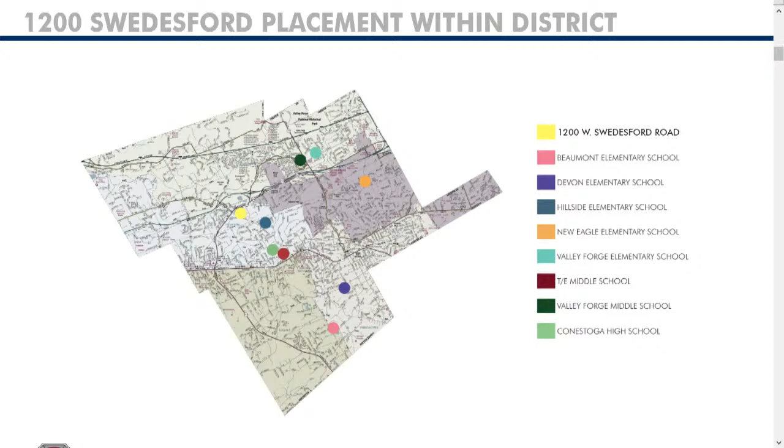To summarize the existing property, it includes a 3-story commercial office building. There's parking clustered towards the north, the west, and the south of the property. There's a vehicular loop that exists presently at the north entrance. There's a grass area immediately north of the building that had in the past been planned to provide for a second building, which was never developed and never constructed.

There's a series of existing stormwater management features, which Mr. Kissinger will speak to later this evening. There's a shared entrance drive off of Swedesford Road, accessing Southpoint 1, 2, and 3, the current office buildings. There's also a pond, a stormwater management basin, located at the southwest of the site. Lastly, there's an existing emergency access off of Howellville Road, south towards the bottom beyond the pond, providing emergency vehicular access over a grass area.

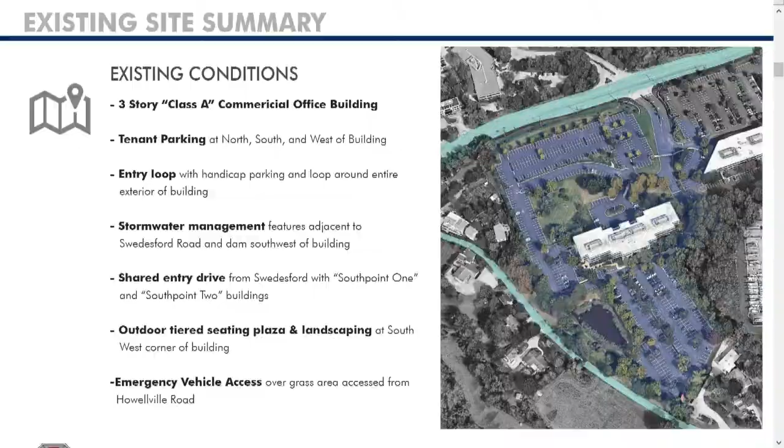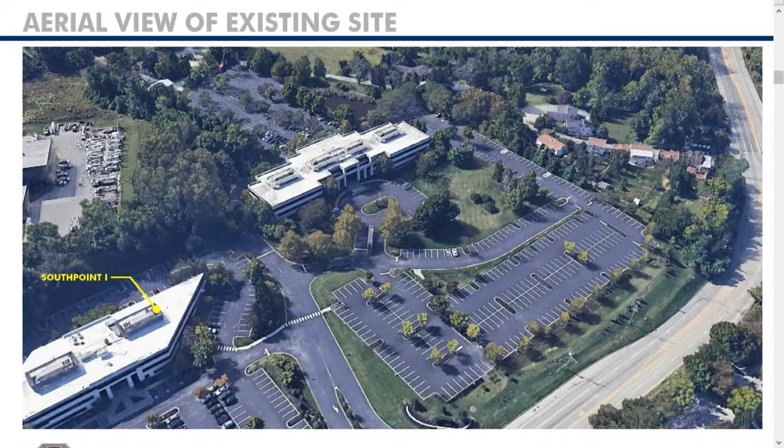I'll now walk us through several photographs which illustrate existing conditions, just to give everyone a better flavor of the current conditions of the site. So this is a view from the north. You see Swedesford Road in the foreground, the main north parking area, and the building beyond.

This is then a view from another aerial view, which illustrates Southpoint 1, the existing commercial office building. Swedesford Road is to our right, and Howellville is really beyond in the image.

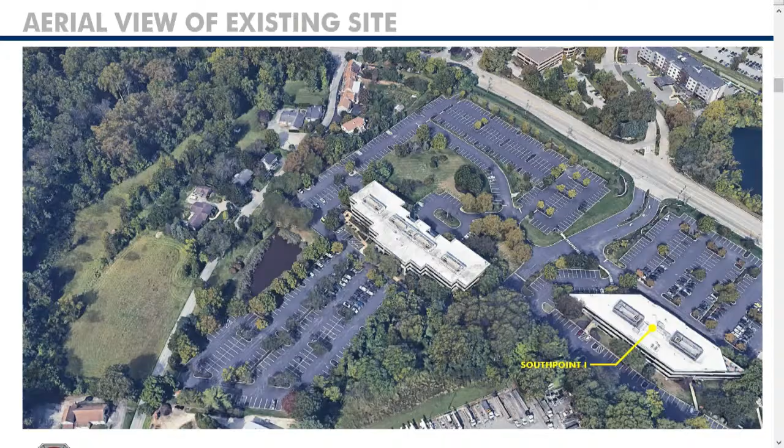This is a view off of Swedesford Road at the existing entrance to this site. So again, this is a shared entrance drive between Southpoint 3, the office building in question, and the adjacent structures. Note that there's an existing median, and that this is a signalized intersection, a traffic signal intersection.

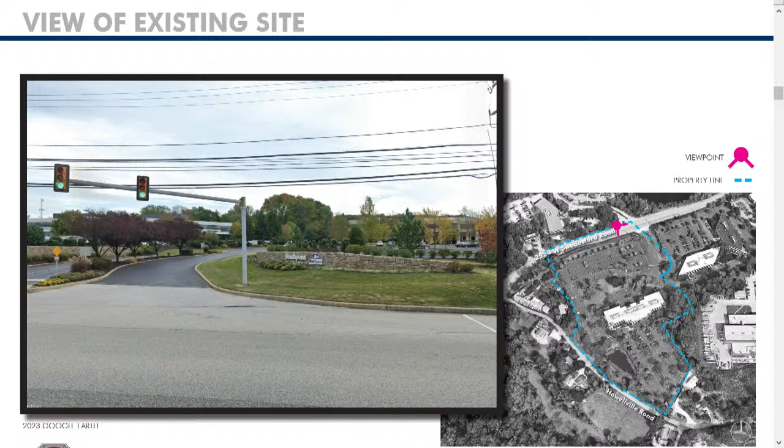This is then a view at the interior of the site. All of these images have a key plan on the bottom right, which illustrates where the view is taken from. So this is really the entrance into Swedesford Road proper, at the point where the entrance drives separate between Southpoint 1 and 2 and Southpoint 3.

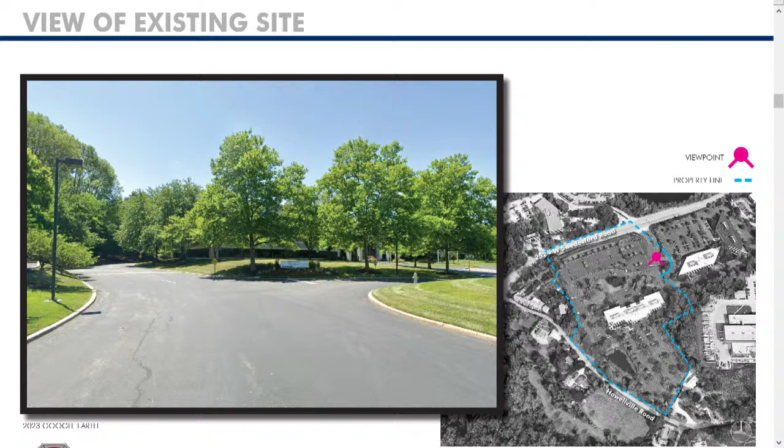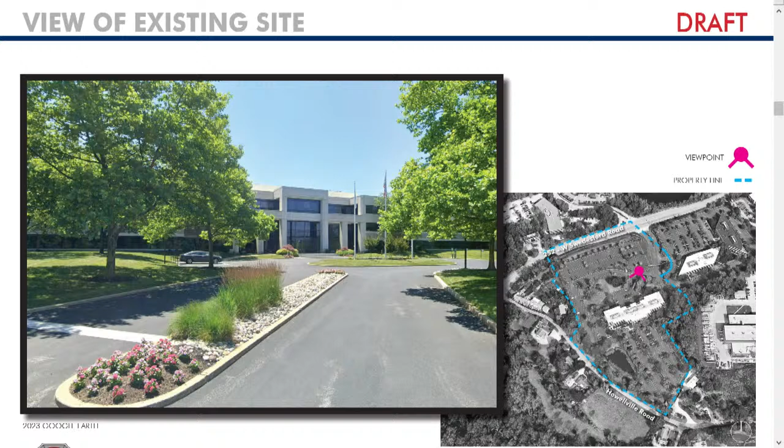This is then a view of the main entrance, the north entrance of 1200 Swedesford Road, a sort of zoomed in version of that entrance. And this is a view at the east, so we're working our way around the building now in a clockwise fashion. This is a view on the east side.

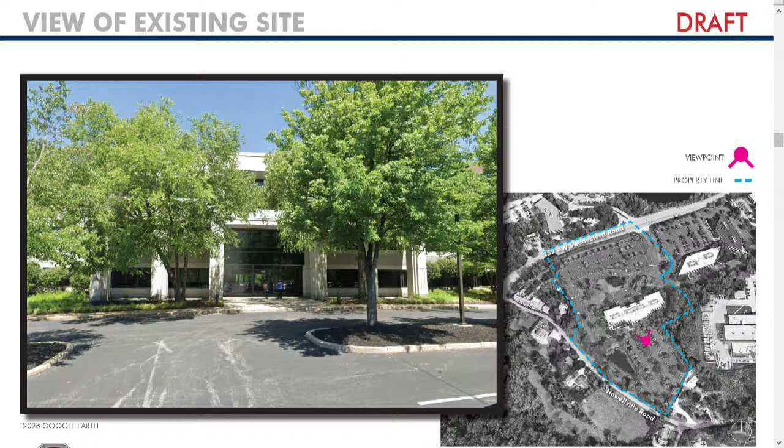This is then the perceived rear of the existing building, adjacent to the south entrance. This is that south entry, continuing to work our way clockwise, and the southwest area. I would note there's an existing tiered outdoor seating area. Also note at the third floor, there's a bit of an architectural overhang at the third floor level.

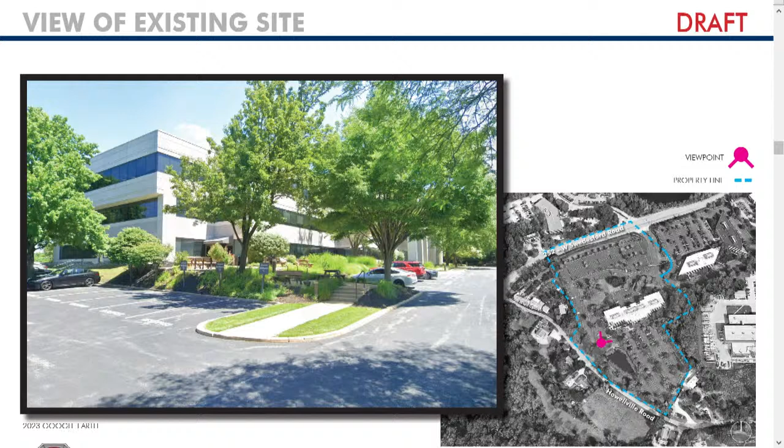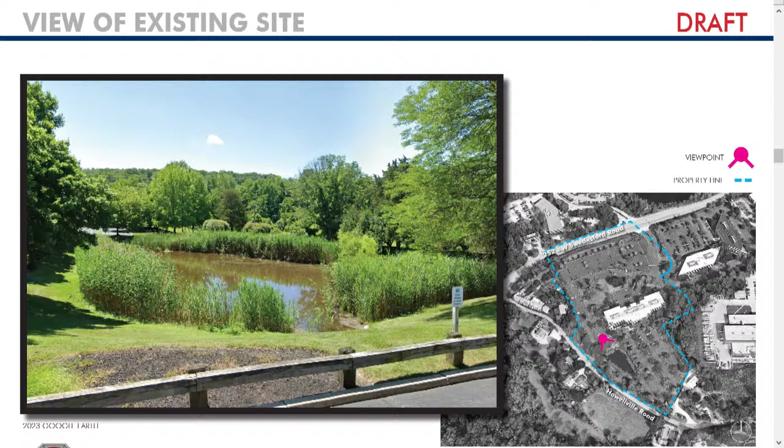This slide illustrates the existing stormwater management pond that we've mentioned, and then slide 19 is an overview of the site features.

I'll ask Mr. Kissinger to give us an overview of the site investigations.

As Mr. Heckendorn mentioned previously, Pannoni was engaged to look at a lot of site characteristics, including environmental and geotechnical. These are a list of a few of the items that we did that are typical during the due diligence period. First is the environmental phase 1 assessment.

Pannoni performed their own phase 1 assessment and also looked at the seller's previous reports to make sure there were no areas of concern on the property, and it was in fact clear.

Pannoni also looked at the land title survey, what we refer to as an ALTA. What that does is look at the encumbrances on the property from easements or other areas. Again, nothing was found there to be flagged.

Pannoni performed a Pennsylvania Natural Diversity Inventory. There were no endangered species. However, there was an item that we'll need to look through as we go further in design about some birds in the area.

We also looked at geotechnical for potential additions and also infiltration for stormwater. That area was investigated in the green areas you see on the property there.

And lastly, on this slide, we also looked at the sanitary sewer capabilities of the building. Converting from an office building to a school is an increase in sanitary sewer flow, so we evaluated the ability for the building to be properly served with sanitary, and it can be.

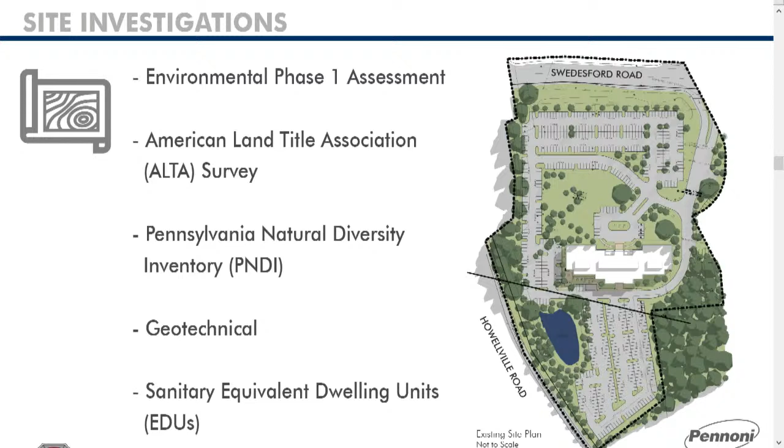Additionally, we looked at all of the utilities for that property and also any kind of distinguishing features such as existing stormwater basins. Looking at this property on this map, starting on the top on the left, you'll see there's a variety of green areas highlighted.

Those are all stormwater basins that were built in 2014, and the large one on the south side of the property was actually built in about 1999 to 2000. So there is a large amount of stormwater management already on the property, a lot of which currently meets code.

We highlighted on the right-hand side an orange line that is the existing telecommunications line, served from the public - it's a Verizon line. Below that you'll see a sanitary sewer line noted, as well as electric lines and water lines as you move down, noted in blue and red.

So again, the point of our due diligence was to make sure that the property was properly able to be served for the future elementary school's use.

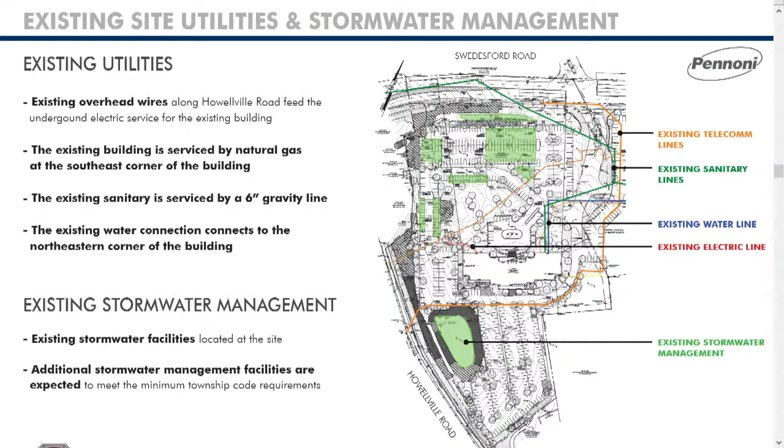To summarize the existing structure, the building was built in the mid-1990s. It's a typical steel frame structure, fully sprinklered. There's a number of what we call, from a building code standpoint, shafts within the structure, consisting of shafts for mechanical ductwork, but also the egress stairways, elevators, et cetera. All of those are enclosed with fire-rated construction.

There's typical building heights, typical structural dimensions in terms of the overall bays for an office building of its size. The general construction is both steel as well as concrete, making the building non-combustible from a building code standpoint. The exterior consists of precast concrete hung on the steel structure, along with insulated ribbon windows.

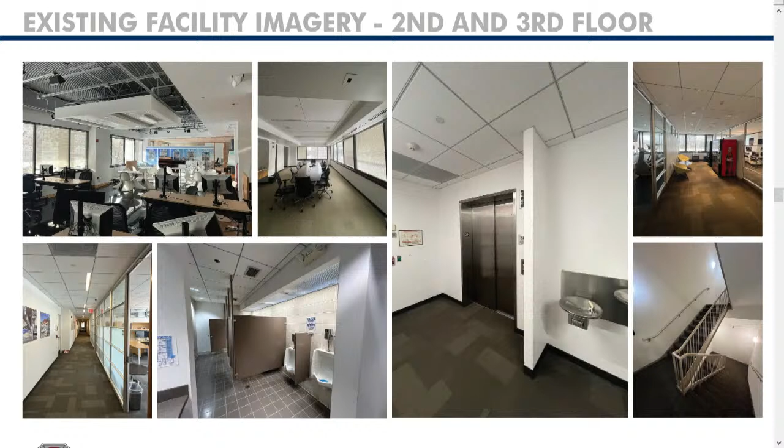These are some additional views of the interior, which illustrate some of the existing office spaces, as well as stairways and one of the upper floor elevator lobbies.

In regards to the existing office building configuration, these are the floor plans at the first and second floor, showing the existing core and shell - the parts of the structure originally designed to be immobile to suit the needs of various office users. Those core elements consist of 3 interior egress stairs, one at the east wing, one at the west wing, one at the central lobby, a passenger elevator, a service elevator, and multi-user restrooms at each floor.

It's important to note there's a little bit of a jigsaw configuration at the top and the bottom, the north and the south. The reason for this is the structure was originally designed to enhance the number of corner office opportunities, maximizing value from a corporate office user and from a leasing perspective. Our concept design addresses that, and we'll get to that later in the presentation.

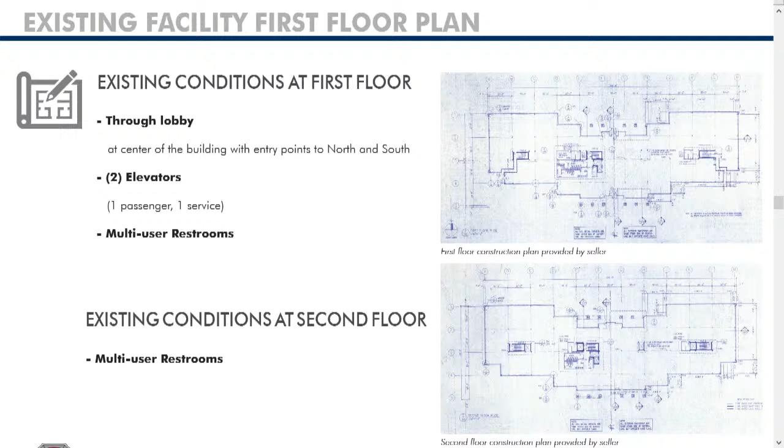At the third floor, there's a bit of an overhang or cantilever that you saw in one of the earlier photographs. At the left and right, or the west and east, the third floor extends over the first and second floors. There's a similar condition at the north and south, where that third floor extends and overhangs the existing floors below.

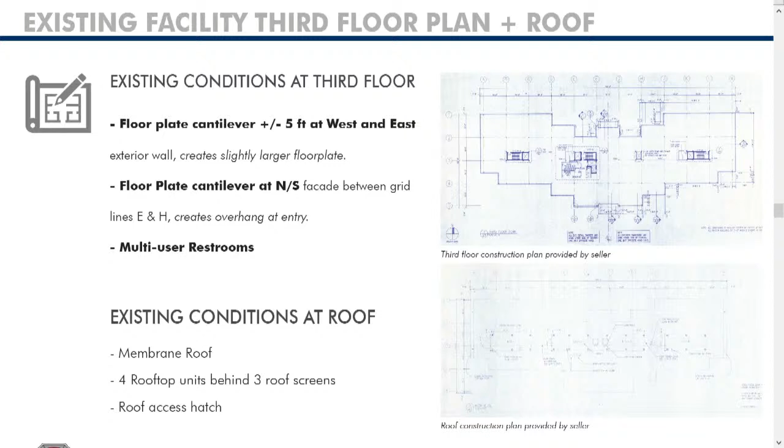Those are existing configurations that our concept design will address. At the roof level, there's an existing membrane roof that's typical and consistent with the types of roofs the district maintains on other facilities. There are also 4 existing rooftop mechanical units, all concealed behind existing roof screens.

From a structural standpoint, as mentioned earlier, AW Lookup, who's worked with the district for many years, evaluated the structural components of the existing building. The primary findings of that due diligence consisted of the following: first, there was really not a structural seismic design when the building was originally designed and built, which is very typical of commercial office buildings of that age.

Based on Pannoni's geotechnical evaluation that Mr. Kissinger mentioned earlier, the property was tested and yielded a seismic design category A, which is a great positive. As part of an adaptive reuse, the seismic design would need to be addressed, and that seismic design category A from the geotechnical testing makes that an easier aspect to achieve from a building code standpoint.

There would also be a need to address structural implications for lateral loads, as well as certain improvements for certain spaces upstairs, which we will address in a moment.

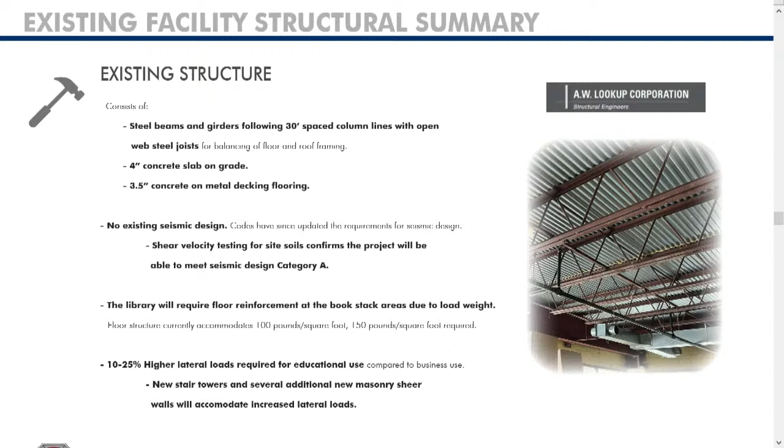In terms of mechanical, electrical, plumbing systems, Schiller and Hersh Associates evaluated the existing systems. In summary, the existing HVAC system consists of rooftop units with ductwork that extends from the roof level, comes down through the building, branches off, and is rerouted via variable air volume boxes, VAV boxes, which is a fairly common system in an office building.

It also consists of an open plenum return. The variable air volume boxes provide treated, heated, cooled, conditioned air to the space, and then a plenum, which is essentially an open area above the ceiling, returns that air to the rooftop units for additional conditioning.

The existing water service, because of its location on the site, in order to demise the building utilities, the domestic water service would be rerouted to the public utility through the site. But the pressure is appropriate, which makes servicing domestic water and sprinklers all very achievable and straightforward.

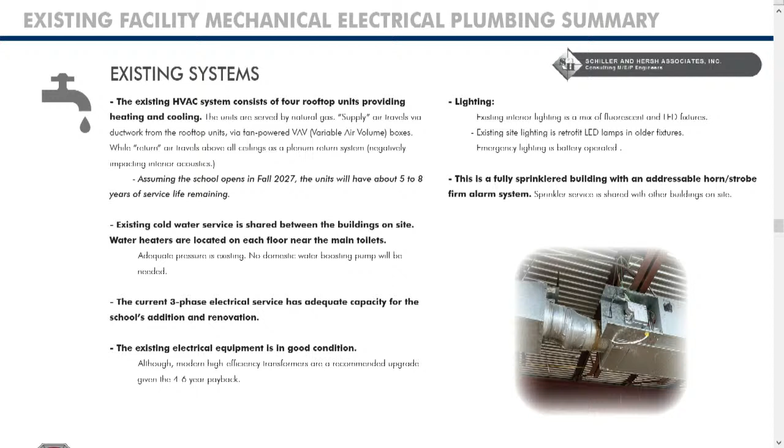The current electrical capacity was judged sufficient by Schiller Hersh for the conversion from office to school use. The current lighting is a mix of older fluorescent and some modern LEDs, and as mentioned, the building is fully sprinklered.

Referring back to the slide about stormwater management, there is a large above-ground basin on the rear side of this property. That basin is very deep, and it was constructed around 98 to 99, and is actually a registered dam by the DEP. It does not meet the criteria of a dam today, but at the time it did due to the depth of those embankments. It has an impermeable liner underneath it to keep water in that pond.

That liner has a manufacturer warranty of about 25 years, so we are quickly approaching the useful lifespan of that liner. Some considerations we looked at were maintenance of that liner, which would require the district to engage an engineer yearly for inspection. Replacing that liner as it approaches the end of its lifespan would require us to dredge the pond, remove existing vegetation, and then replace the liner. So there is a consideration of those replacement costs.

Additionally, that above-ground basin would require a lot of safety fencing to prevent concerns related to having that playground area in proximity to that pond.

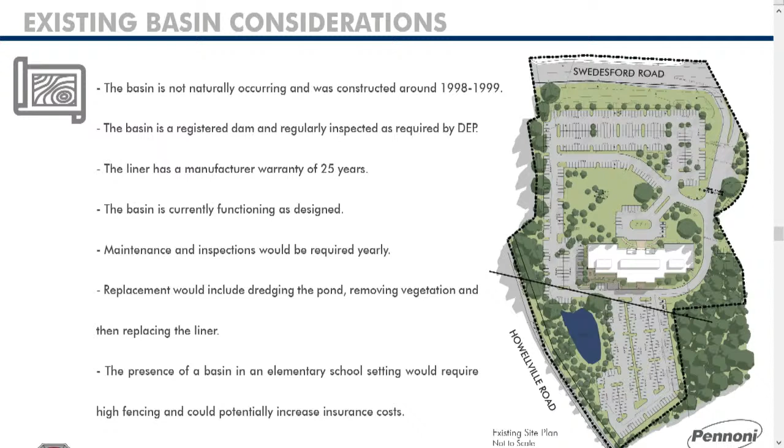At this point, we'd like to turn the presentation over to our solicitor, Ken Roos, who can provide some work that takes place on the legal side as well regarding due diligence, and he can provide both a summary of that work and also how it relates to the resolution before the boards for consideration this evening. Thank you.

In general, all real estate transactions involve some sort of site-specific issues. Since this building is currently part of an office park, there are some nuances peculiar to this deal that do need to be addressed. Right now, the building is part of an office park with the adjoining parcel, and the buildings look like they're all part of the same office park. And there are agreements in place now to make sure that those things remain the same.

What is happening with this particular case is that because the school district is acquiring the property, those agreements are going to be ended, abrogated, so that what's left in place is that we are operating an elementary school. We are no longer part of an office park. The property is no longer part of an office park. And there are some few remaining issues that do need to be addressed.

There are certain things that can't be separated because of the properties. They share an access, they share utilities, which I will talk about in a second.

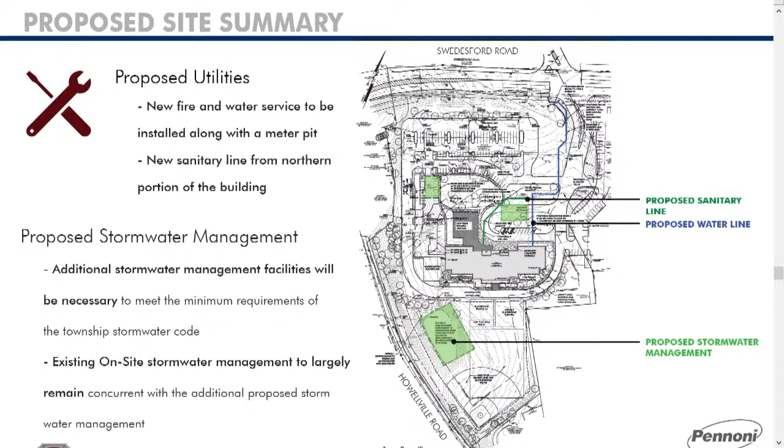Moving on to the building itself, the concept design would yield a school with comparable spaces to any of the existing elementary schools. In general, we're at the higher end of average in classroom sizes and specials rooms like art, science, and music, and we have slightly larger common rooms such as the cafeteria, gymnasium, and library, partly because we have a few more classrooms proposed than the typical elementary school, 30 rather than 28 or 27. Having that additional breathing room in common spaces is important from a scheduling and use standpoint.

The lower graphic illustrates what portions of the building are proposed to be reused versus new. What's shown in green tone is the existing building, and what's in black and white grayscale represents two new additions adjacent to one another. The first is on the north entry where the entrance to the through lobby is. You'll recall we discussed the jigsaw nature of that area with lots of corner offices, which is challenging for creating an interior space plan with a corridor in the middle and classrooms on both sides.

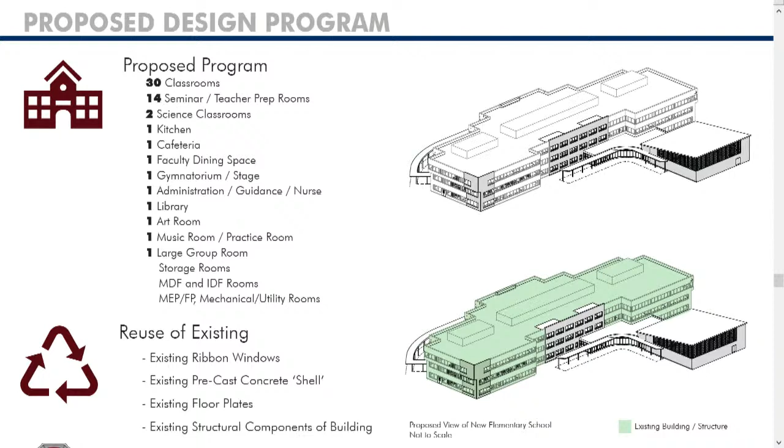This is a fairly straightforward illustration of the existing square footage and the potential for shell space. As part of the evaluation, we were looking with the school district on the program, the parts and pieces, rooms required to satisfy the instructional program. The gymnasium just didn't make sense from a square footage or demolition reconstruction standpoint to try to fit within the existing multi-story office building.

In this scenario, we end up with a surplus of about 9,000 square feet that could be utilized by the district in the future for a use to be determined, which translates to an overall building of just over 99,000 square feet based on this concept design.

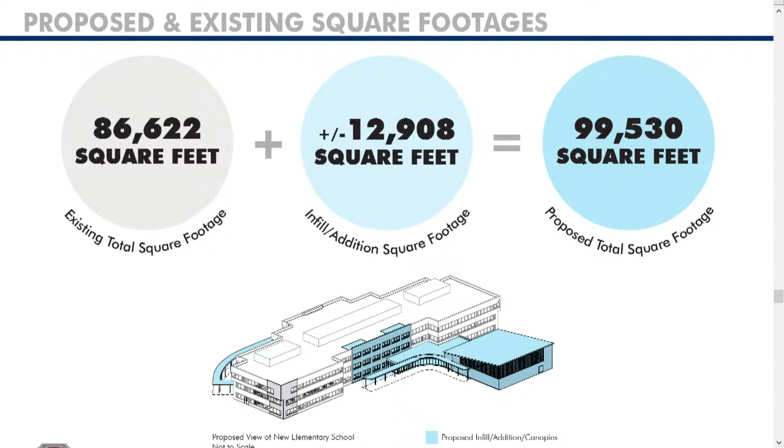We're also proposing to modify and relocate the stairways. The 3 internal stairs were really designed for office users, not for large numbers of elementary school students changing classes at the same time. There's sort of a rush hour effect, if you will. So those stairways would move to the perimeter.

The stairway at the center would remain at the center but get larger, and that would also help us address some of the items I mentioned earlier relative to the structural engineering and complying with current codes.

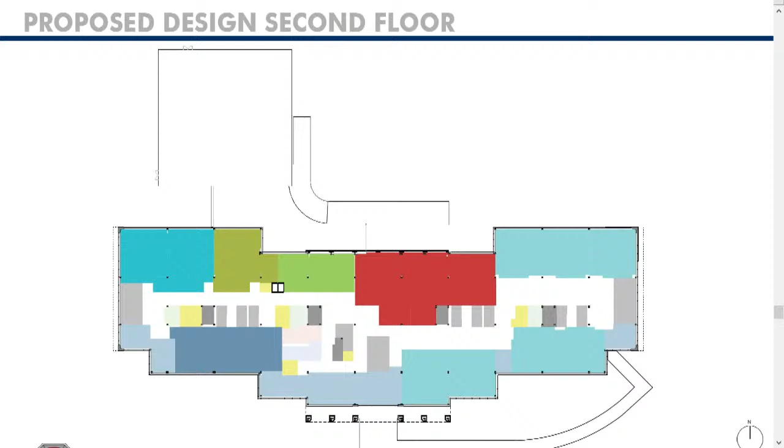The second floor would then include classrooms for second grade, as well as the library and all of the special spaces - science classrooms, music, art, as well as the large group room. The third floor would consist of the hatch indicating future shell space, as well as primarily classrooms for third and fourth grade.

I think what's most important about the layouts to date is the students' perception of the building and how they perceive and move through the space. From a kindergarten through second grade standpoint, this is essentially a 2-story building.

Imagine a sort of slice of bread of the building - this is a basic building section. The gymnatorium, lobby, cafeteria, all the kindergarten and first grade classrooms clustered at the first floor, and then second grade, library, large group room, et cetera, all at the second floor.

So unless you're a third or fourth grade student, there's really never a need to be up at that third floor. We're trying to take into account the students' experiential journey through the new structure.

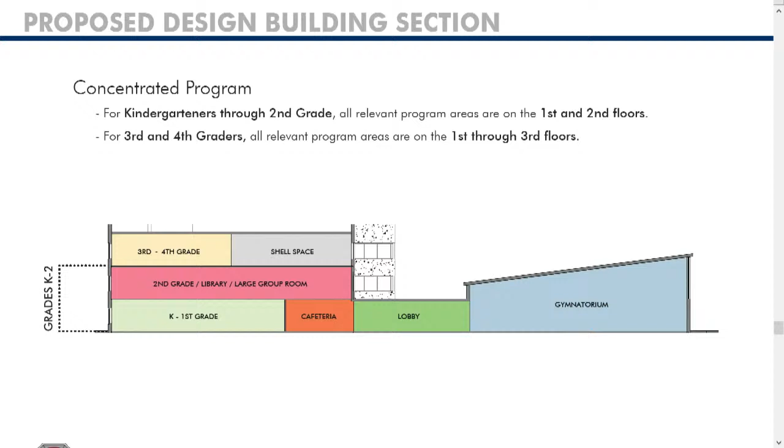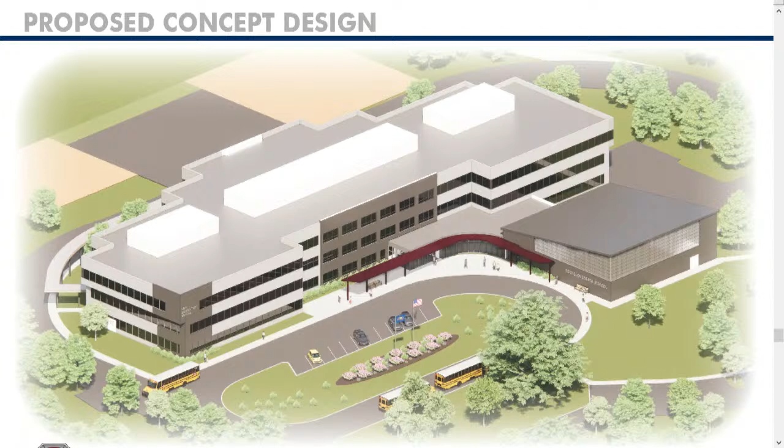The general thinking was to essentially utilize brick and punched windows, which are a traditional Pennsylvania school architectural motif, and a brick tone that would complement the existing precast concrete for the new construction, and do some very selective and limited facade envelope improvements.

We're showing some here at the corner of a thin brick that would complement it to try to tie the whole composition together. This gives you a view of that main entry, and a view of a potential new bus canopy at the bus loop.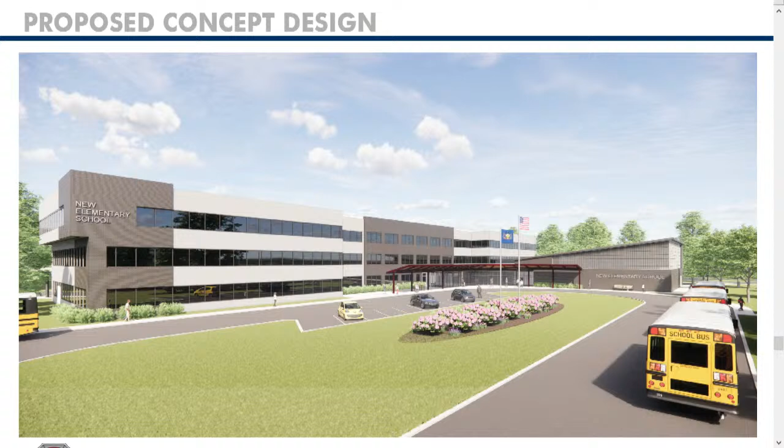The goal here is really, we're not trying to build a Taj Mahal, we're not trying to add every bell and whistle, but we're also not building a Butler building or a shed either. We're trying to walk a fine line of providing an appropriate educational environment that can be used for the next 50 years.

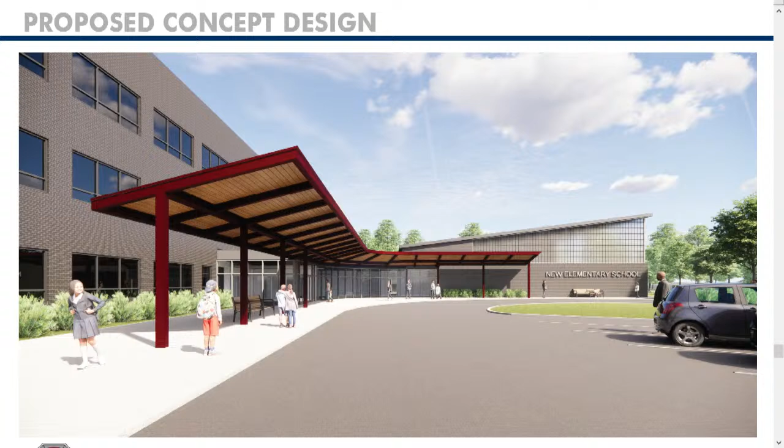So from an HVAC standpoint, we'll talk through several of the building systems. We looked at many options working with Schiller and Hersh on HVAC, and we considered supplementing the existing system, partially replacing it, or looking at a high-performance new system.

The main issues we're trying to address are filtration as well as acoustics. Because of the existing system configuration, leaving it in place or modifying it would result in issues for filtration and acoustics that wouldn't match the district's other educational facilities. So what we arrived at, subject to further refinement during schematic design, is a variable refrigerant flow type system. It's very common in commercial structures today, works well incorporating into an existing facility with limited floor-to-floor heights, and satisfies filtration requirements as well as acoustics.

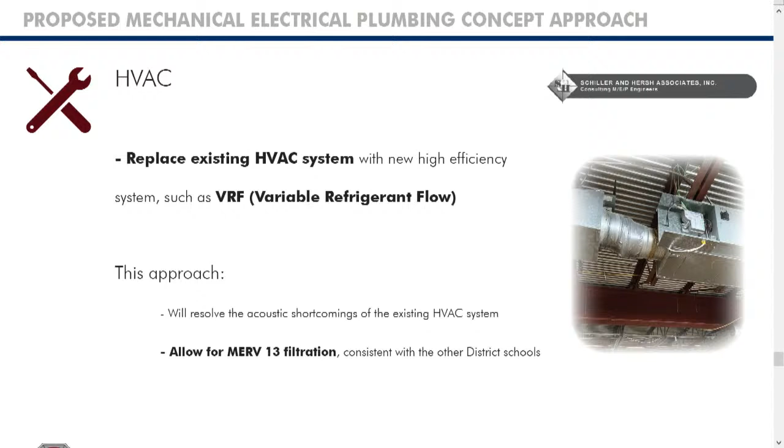In terms of approvals, we'll have a short discussion. Mr. Kissinger and I had a preliminary meeting with Tredyffrin Township and discussed the overall approach to the project. There are really three sequences of approvals that we anticipate the project will require.

One is zoning relief. As Mr. Kissinger illustrated earlier, we're taking an existing site that has a lot of asphalt paving and a fair amount of stormwater management. We're going to maintain all that stormwater management, decrease the amount of parking and paving, create more pervious surface, and still add more stormwater management. Because of the history of the site, the details of when it was developed, and subsequent zoning changes after it was developed, we're still going to need some relief, and we'll go through the Township Zoning Hearing Board to request it.

Subsequent to that, or towards the end of that, we anticipate going to the Township Board of Supervisors for a conditional use hearing. A conditional use is sort of a lower standard of relief required because it's not a variance. That process would be required in order to ascertain what conditions are associated with placing a school here.

And then lastly, we'd go through the Township Planning Commission approvals process from a land development perspective to evaluate the reconfiguration of certain parking areas and asphalt, and incorporation of playgrounds and such. There are some other regulatory entities we'll need to interact with for erosion and sediment control, but we don't anticipate any work associated with PennDOT. These are really the primary regulatory approvals we need to navigate.

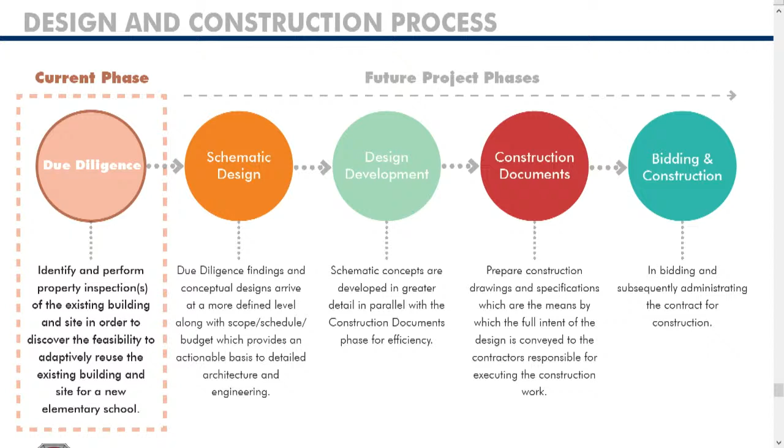From a schedule and cost standpoint, I'll share this slide again. We're in due diligence. There are many decisions to solidify anything of what you're seeing tonight, and there's a long way to go. In terms of a very preliminary schedule, this essentially acknowledges a due diligence period which extends to March 18th. As you heard earlier from the district solicitor, Mr. Roos, that is subject to validation.

But this schedule contemplates that as a due diligence date and anticipates moving forward with approvals, design, schematic design, documentation, bidding, et cetera, with the goal of completing approvals and bid documents towards fall of next year, towards November of '25. Again, this is preliminary, a starting point.

From a budgetary standpoint, this is a project budget based on four building blocks. One was Becker-Frondorf, a third-party cost consultant, as noted in the second slide of the presentation. We've worked with them on the Conestoga addition, the Fields project, and the infrastructure projects the district proceeds with every summer. We provided them with our concept design and engineering information, and they used that to develop a cost estimate for construction, which includes some contingencies.

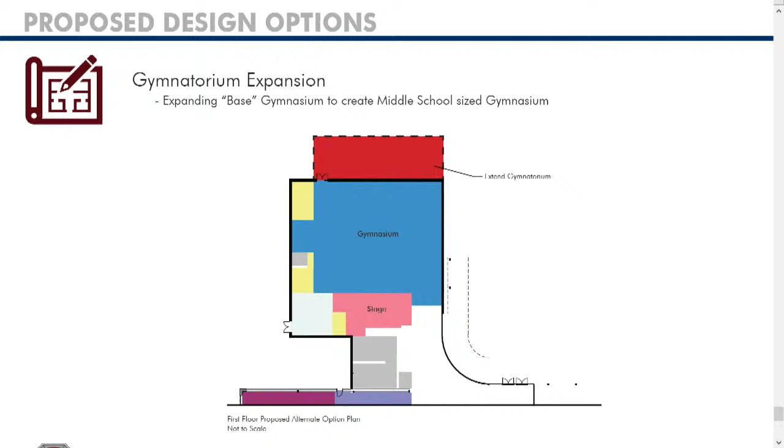As an example, the gymnasium, the gymnatorium as included in the concept design, is illustrated in blue. The red illustrates a potential extension, which would bring the gymnasium space in line with one of the middle school gyms. This is simply an illustration of one potential option. To Dr. Gusik's point, there'll be many options evaluated as part of the project should the purchase continue.

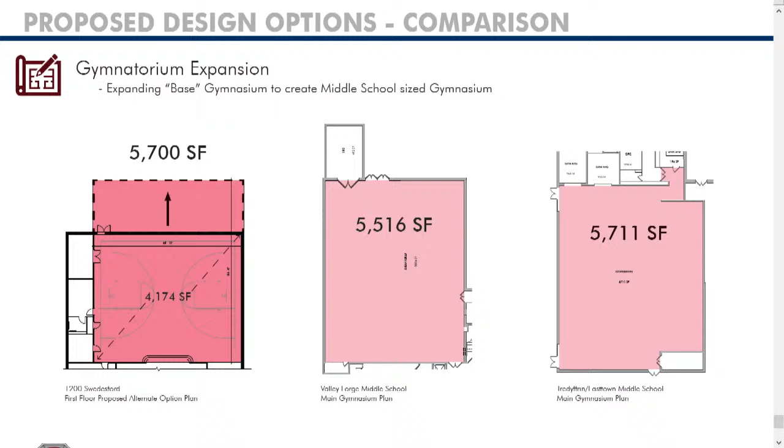One item I didn't touch on directly was the environmental sustainability of the project. This is an incredibly sustainable project. We're taking existing asphalt paving, removing it, maintaining and adding more stormwater management. We're taking the shell of an underused built environment asset and repurposing it for a use that will provide for instructional purposes for many years to come. This is a great opportunity.

With that, we'll turn it back to you, President Kantorsek.

Thanks, Dr. Gusik, and thanks, Matt and Mike, for all the work you've done, and I'm not going to ignore Art and Dr. Simondero over here as well. Even though they didn't speak, they did a lot of work too. It was a very compressed time frame to gather a lot of information about this building and its usability for an elementary school, and you guys did a nice job, which is obvious in the presentation and details.

Still have a couple of questions, I imagine, that the board and folks have. I have one to start — it's really not so much a question, but more an ask for additional details. We talked about the upgrades to the HVAC system, and as you could see from the cost item, that's one of the more significant additional costs. Could you provide more detail about the unusability of the current system from an acoustics and filtration standpoint, and why you think it's important and critical to upgrade or replace that system?

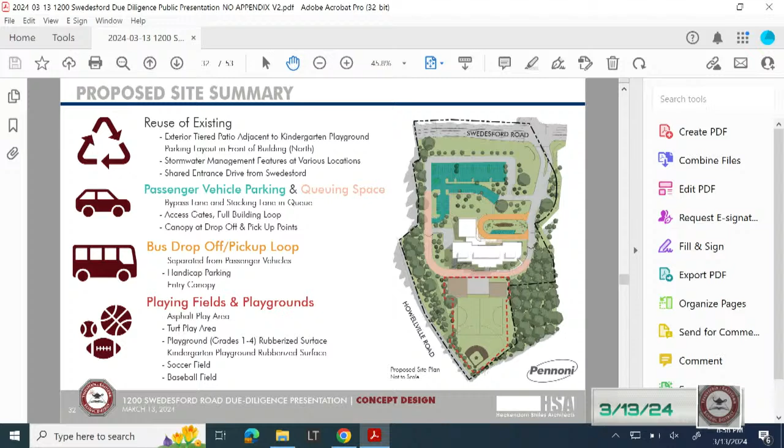The brown boxes on the left and right immediately below the loop road are rubberized surface playground areas. The light gray box in between them is an asphalt play area. The tiny strip below that light gray box is a small area of turf. Those 3 components - the rubberized surface of the playgrounds, the asphalt play area, and the small strip of turf - are part of the district-wide playground study. It's consistent with what exists or what will be added at all of the elementary schools. Everything below those brown playground boxes - the soccer field, baseball, all of that - is proposed to be grass field.

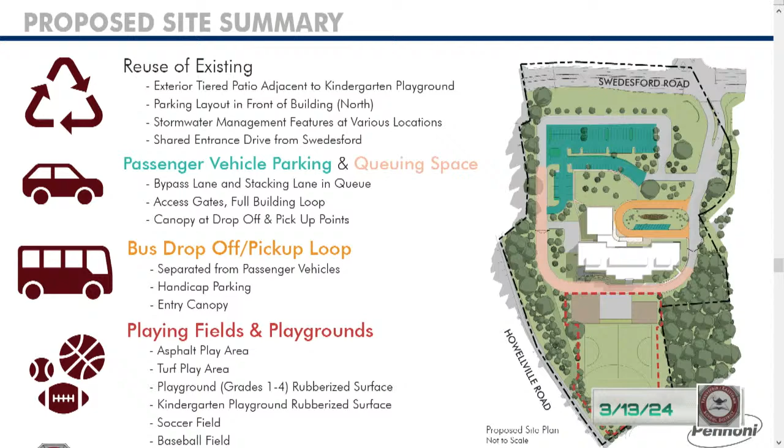What makes this not apples to apples is that we were able to go through this due diligence process and actually have experts on site to do the environmental studies, all those studies necessary for us to refine that price before we gave it to Becker Frondorf and had a revised price. Ultimately, we can look at that revised price, based before we looked at the pond and the HVAC. But if we compare that to the other two, there could be movement within the low to high range if we took those same steps with those other properties, put experts on, and did this level of work and developed site plans.

It also produced less school, right? So we could only get, because of the size of the Berwyn site, 26 classrooms, no shell space, not as large other areas. So it isn't truly apples to apples to apples, but I get it—certainly we want to look at the price of all of those. One of them we were able to take a 60-day period and dig a little deeper to get a better number, and the other two we weren't, and probably never would unless, for example, this would fall through.

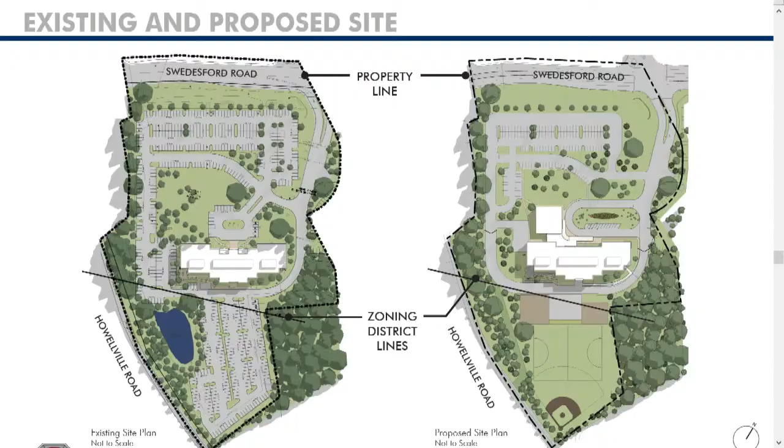In terms of the traffic evaluation, a school and an office actually work collaboratively, where the difference is a school has fewer cars coming in the morning than an office would at peak, but they turn around and leave—so there are more cars leaving, but they're not conflicting with anybody as they leave. So in fact, the driveway as designed can handle the in and out of that school very well in collaboration with the office park it's in.

We will obviously have to do a traffic impact study, but we don't see any off-site improvements being required. That's the clarification to what Mr. Hagedorn was talking about. Specifically, sidewalks and crosswalks wouldn't be applicable here since there really isn't any walkable neighborhood to this school, so it wouldn't be designed for walkers—it would be more for buses and cars.

And then you talked about emergency access on Howellville—there is an emergency access on Howellville, which will absolutely be maintained as part of our designs. Howellville is a township road, not a state road, so we can maintain the access way onto Howellville without including PennDOT, since it's a township road.

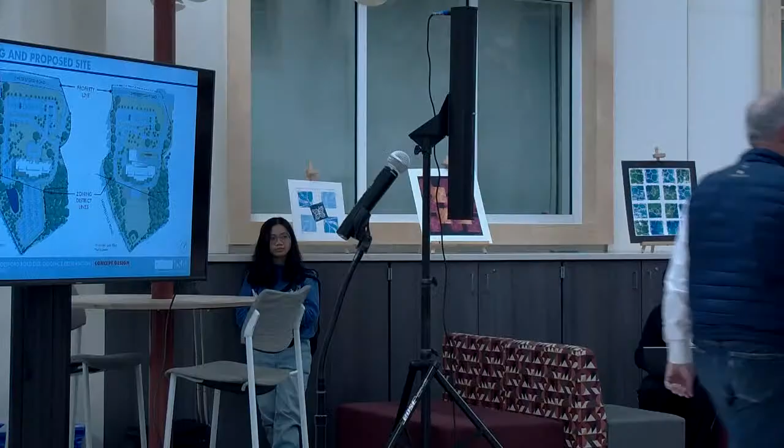Okay, thank you. How'd I do? All right. You did well, as usual, Mike. Thank you. Next person up for comment is Maura Redmond.

Hi, Tredyffrin. So a couple of questions. Do you know what species of turtle is on site? My concern being that the bog turtle is a protected species. Can you speak to the bird issue that you mentioned in the beginning? If the pond is covered, does that remove the liner issue?

Closer? Okay, I was hearing feedback. Okay, do you want to start over?

Okay, all right—you'd like expansion on turtles and birds. Do you know what species of turtle is on site? I'm concerned because the bog turtle is a protected species. And can you speak to the bird issue you mentioned in the beginning? If the pond is covered, does that remove the liner issue?

When will the redistricting process begin when construction begins? And how does the larger gym proposal fit in with the concept of parity between the elementary schools?

Okay, we'll turn to the folks to answer some of those questions. Yes, let's start with the turtles and the birds.

So the PNDI that we did came back with no hit for bog turtle habitat. I would assume they'd be box turtles or whatever, but we do have more work to do there. The bird hit was for blue herons, so not an endangered species, but a protected habitat while they're nesting. That would impact the time of year we could remove the pond. So it was turtles, then birds, blue herons, and then the liner issue.

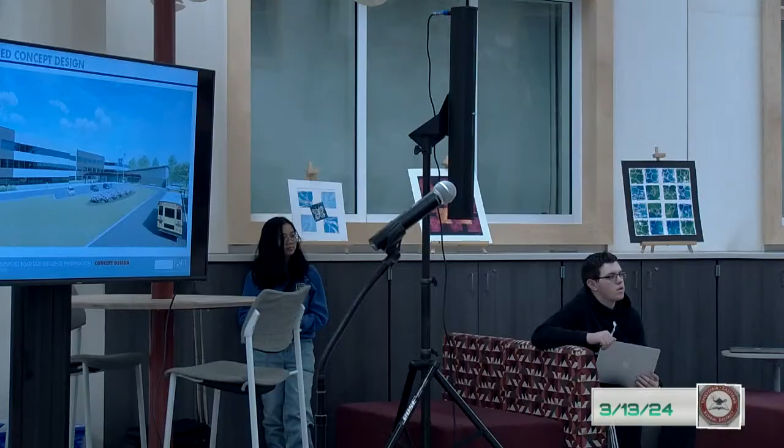Thank you. Sure, come on up. Before you ask though, come on up and get back up here.

But while you're walking up, there was also a reference to potentially using the shell space for additional space for the kids, and so I just want to clarify what you mean by shell space. The shell space at the moment will be undeveloped, where we're largely not going to spend resources developing it.

The hallway will end, and behind that, at the moment, a first use would be storage. You never have enough closets, right? And there's always things we need to store in that school that we could use. There's a service elevator already in place that we could move up and potentially have some extra storage space. I don't know that it wouldn't be developed - it wouldn't have the HVAC ventilation, it wouldn't be designed to hold students, but more be an in-and-out space.

I think of it as an expansion bay, because right now when we talk about the idea of maybe trying to look at a modular classroom, we could potentially add a classroom in that space. Or if there's a special program that emerges that we want to house in that building, we could do that without taking spaces in the other schools, and we can convert that space more long-term.

But originally as shell space, it would be undeveloped, and for all intents and purposes, the use of the school would end for the students outside of the shell space.

Question is, I know it's not a very residential area, but are there any residents near it, not within our envelope? Because in Easttown, residents love to shoot things down when they don't like it. I was curious if it's different in Tredyffrin, because I understand that if people are within a certain footage, or maybe 0.25 miles, they can legally fight against you. Don't quote me on this though.

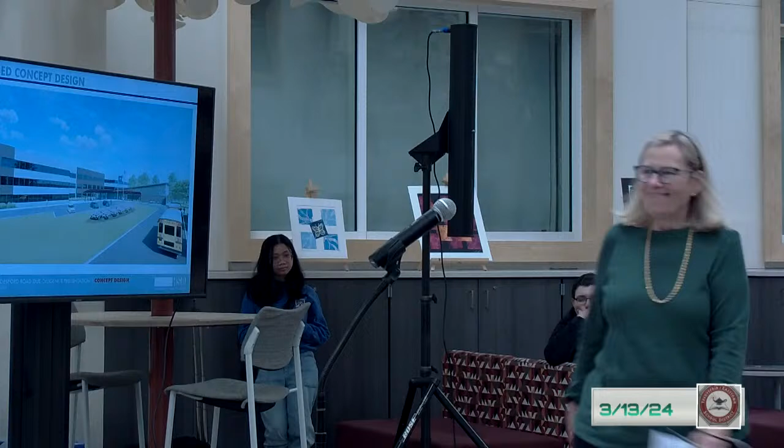Thank you, Mr. Dirks. And our last commenter of the evening will be Ms. Carol Clark. Hi there, Carol Clark from Tredyffrin. First of all, thank you very much for all the work you've done on this and continuing to reach out to the public. I hope a lot of people are watching this - you can stop watching it now at home.

Two quick questions and then a comment. One: I'm assuming that the kindergarten rooms we're building will have enough space on that first floor if we go to full day kindergarten, since we'd need twice as many kindergarten rooms at that point. I'm assuming the calculations have all been done so that's laid out in the first floor plan. If not, please correct the record for me.

The second question, I'm dreaming here a little bit. Do we have any wiggle room in the price for the property? Doing the due diligence, we've learned some very useful facts. The HVAC has a limited lifespan right now - anyone going in would have to put in very soon a couple million for the current HVAC system if it was a business. The other issue was dealing with the liner, which is only good for another year or so. Anyone going in would have to probably replace that liner, and they'd be faced with, who knows, maybe close to $1 million. I have no idea about this.

But is there any wiggle room at all to go back and say, hey, we've done our due diligence, we found these things - is there any way you can reduce the price?

I'll come back to that. Also, there was an idea I had before, it probably isn't valid, but it's worth putting out there. Is there any way that the seller would want to make some sort of donation to the township, or excuse me, to the school system, by reducing the price and doing that as a write-off if they can use that on their taxes in any way?